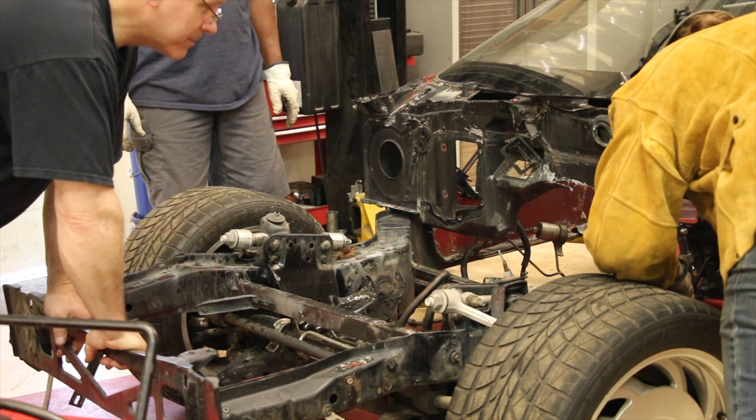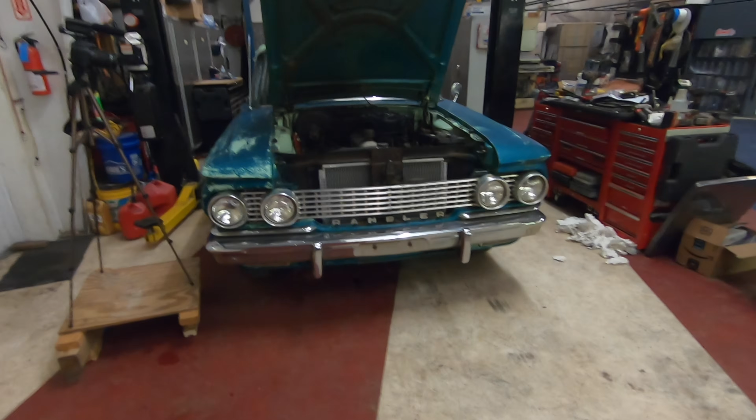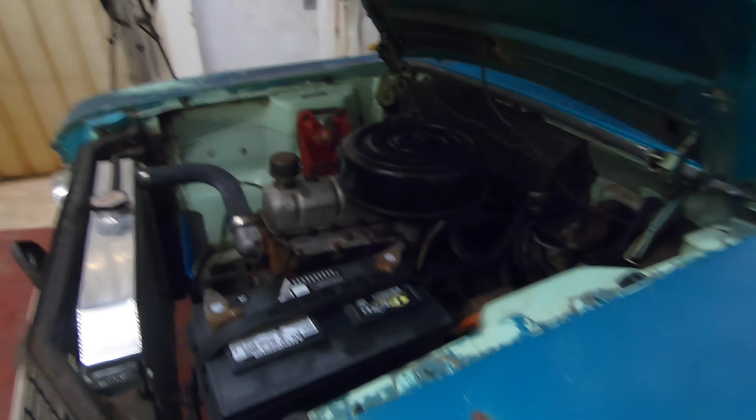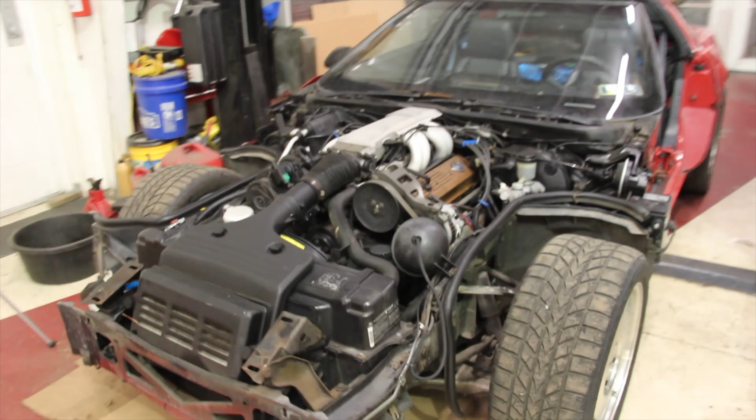Alright guys, so we're back on the Rambler station wagon build. If you haven't been following along, we are taking a 1961 AMC Rambler Classic station wagon and essentially putting it on top of a Corvette frame. But that isn't as easy as it sounds, so we are ripping the entire Rambler apart, ripping the entire Corvette apart, and designing the entire frame in CAD from scratch. We had to measure the entire Rambler, measure the entire Corvette, and then design how they're going to fit together.

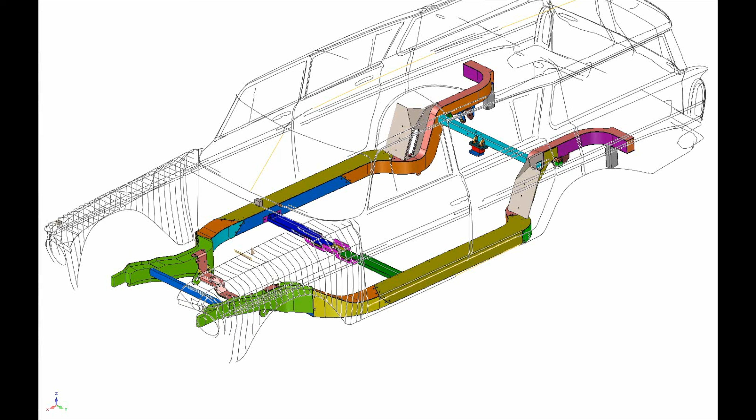So at the end of the last video, this is kind of where we left off. We are using the green section of the frame, which is the front of the Corvette frame, and the rest of the frame we are making ourselves. So in this video, we have to figure out what power plant we're going to use and how we're going to fabricate the rest of this frame.

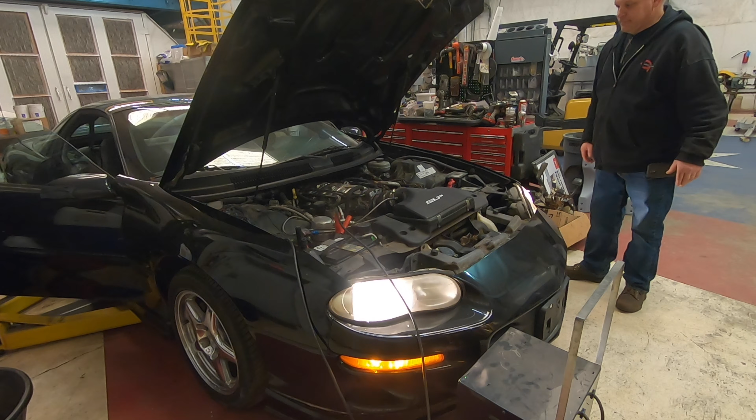So I know you're thinking, another LS swap. Yep, that's what we're doing. It is the easiest and the most affordable way that we can make really good power in the Rambler but keep it reliable at the same time.

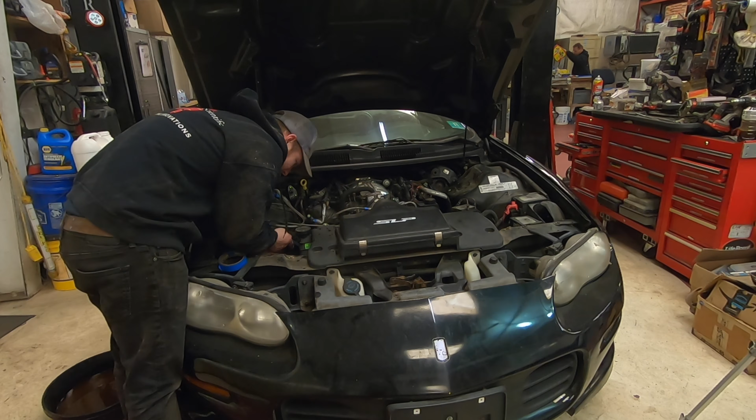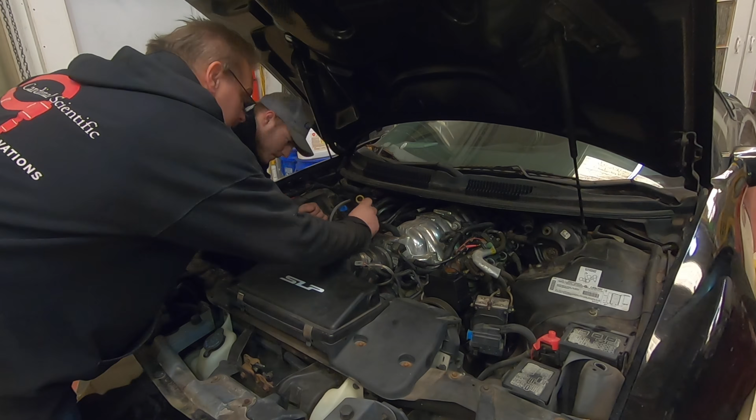So we ended up picking up a 1999 Camaro that was already built with heads, cam, an aftermarket clutch, a T56. It was tuned, it had injectors. It was a really nice car, but ended up having a salvage title, so we got the entire car pretty cheap, running and driving. That way we could test it out, see if it was good. And it was a really good platform to start with because we had the whole harness and everything that we could use. So as you can see here, we gotta rip the whole motor apart so we can try to fit the motor into our chassis we're building.

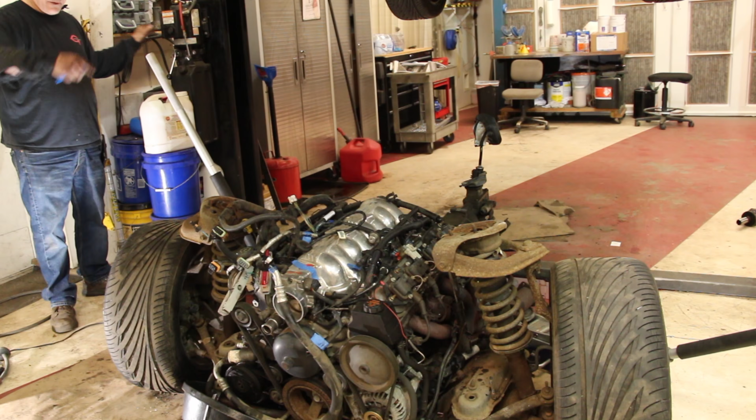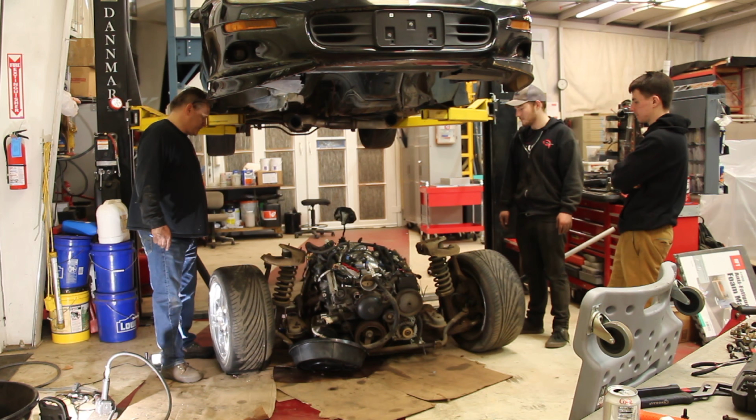So we got the motor out. We were kind of baffled about how tight it was, and it was kind of nerve-wracking to see how tight it was in that Camaro. If you're not familiar, F-body Camaros are super tight engine bays. The motor's really shoved super far back under the cowl, so you can't even get the intake manifold off easily. It's just really difficult to work on inside the car.

But we ended up dropping it out from the bottom and getting it planned out into our chassis. Alright, so this is what it looks like with the motor in the frame.

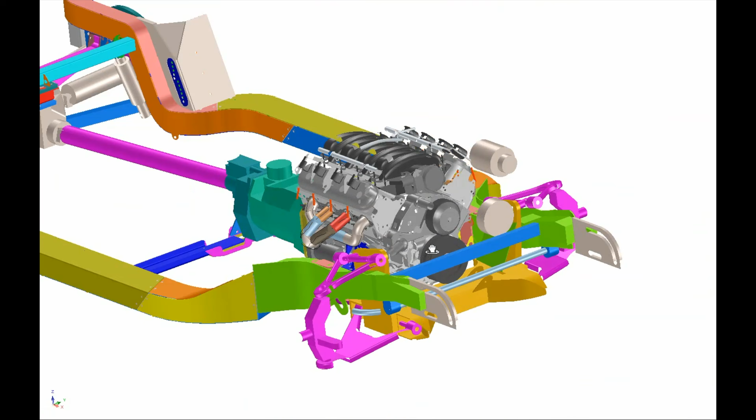As you can see, we wanted the Corvette to handle just as well as it did like it was designed from the factory. So we wanted the motor to be pretty far back, kind of like it was originally in the C4, but obviously with an LS. And if you don't know, a C4 is a cast iron block and an LS1 is an aluminum block, so we're saving a little bit of weight off the nose.

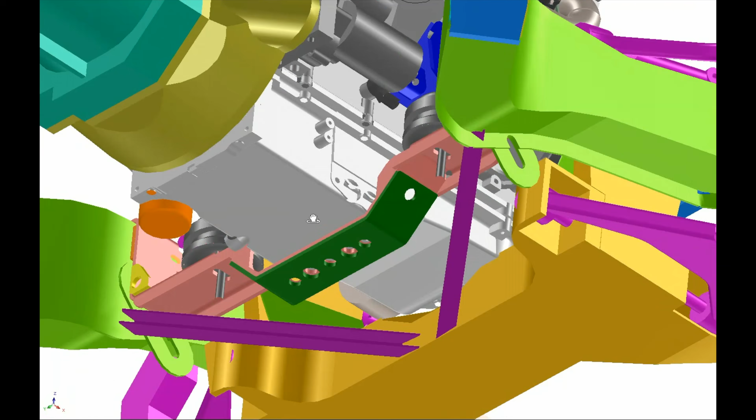We also have to design a cross member for our T56 transmission and engine mounts for our LS. So we decided to go with a C5, C6 style motor mount. They're a lot easier to get in and out, it's just 2 bolts from the bottom. I recommend if you guys are doing LS swaps to try to incorporate those motor mounts. They're super awesome, and it made the frame go together pretty easy.

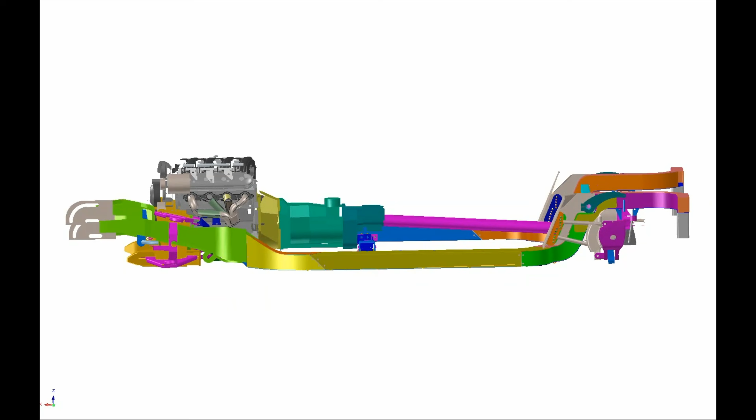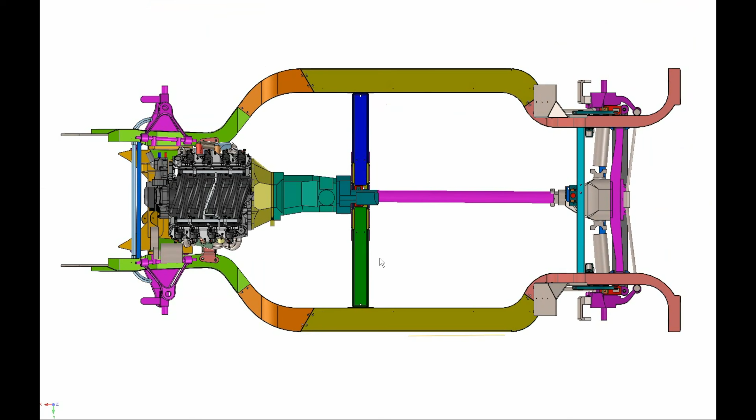So as you can see, kind of a side shot of the frame. Look how tall the transmission tunnel is and the drive shaft tunnel has to be if the frame is the bottom of the floor. So we're going to have a pretty big invasive transmission tunnel and a pretty big invasive drive shaft tunnel that we're going to have to accommodate for in the frame design. But you know, that's part of it. Because it's independent rear, the drive shaft doesn't move, so it's going to have to be tucked up pretty high.

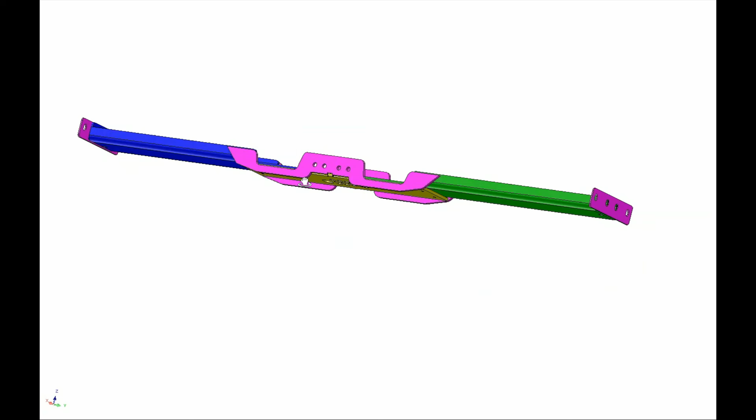So now with our cross member for our T56 transmission, the frame's super wide, so we need a strong cross member that is also low profile because the floor is so flat. So we have some bracing in it and also some cutouts so we can fit our exhaust underneath.

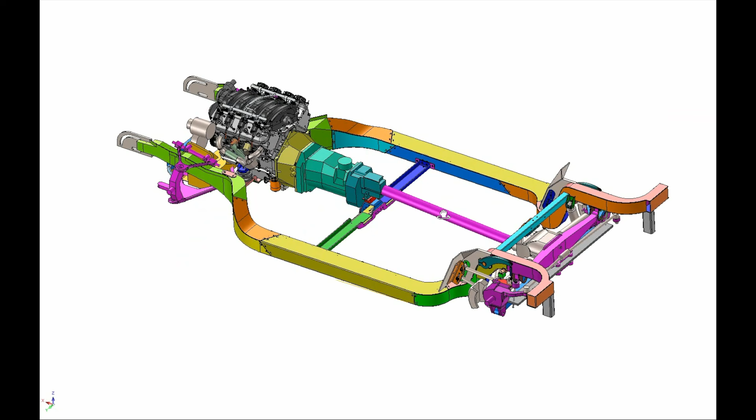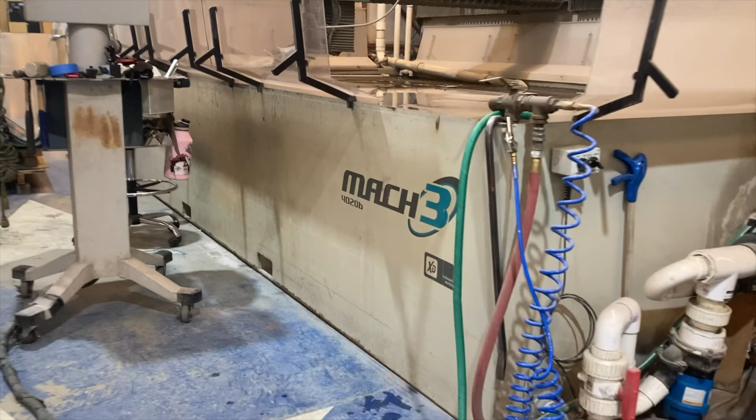So now it's time we gotta start making this stuff. The way we're gonna start manufacturing this is we have a water jet, which if you're not familiar with what a water jet is, it's a machine that can cut a variety of materials with just water and a little bit of sand. This is able to cut out all the pieces that we're going to need for the Rambler frame and be able to cut them precisely enough so we can bend them up and weld them together. So let's start making this frame.

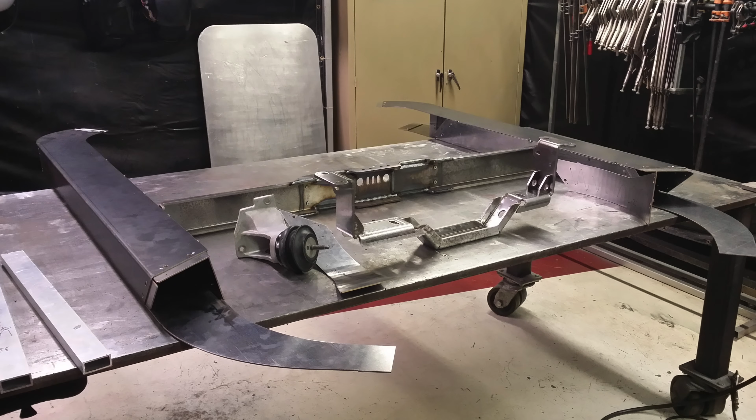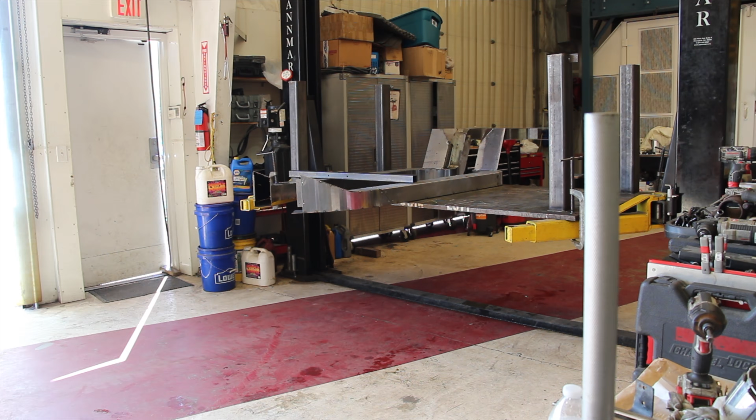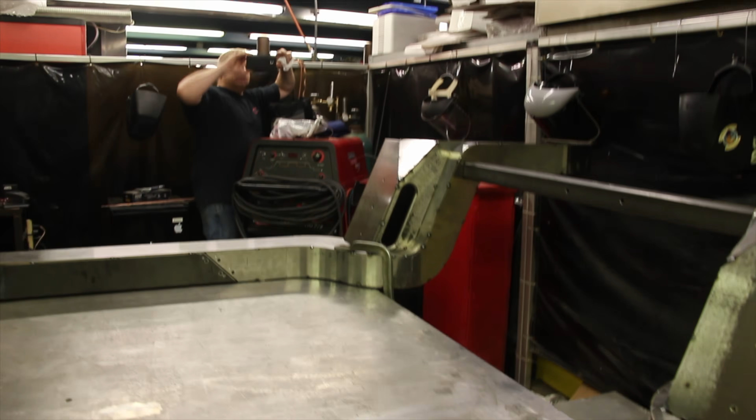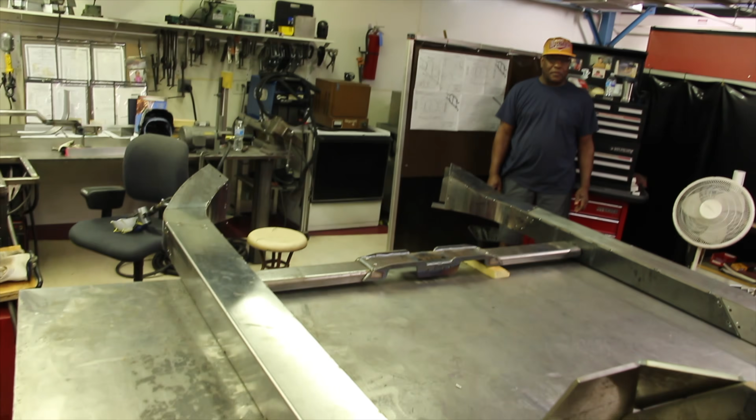I don't have a ton of footage of us bending up the frame and welding it together, but you get the idea. We water jet the parts out, go to the press brake, bend them, and have our welder Don weld them all together to mock up what it's going to look like. The way it goes together is kind of like a box, and he just has to spot weld them together. They're reinforced on the inside, and then he can go through and seam weld all of them together at the end.

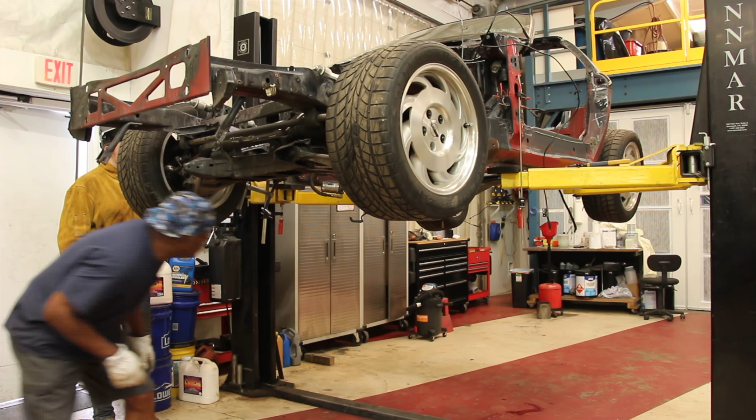Now we're going to start cutting up the C4 Corvette. On the front of the frame, it looked like it got hit or bent a little bit in its previous life. It wasn't severe enough to really concern us, but we noticed it so we could account for it when we weld the front clip to the frame we're making.

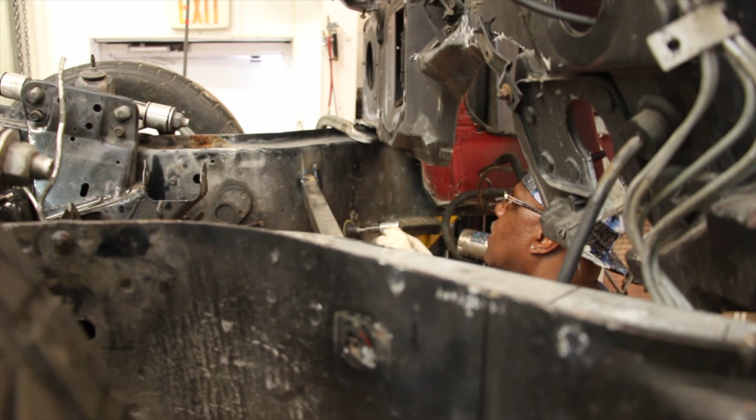When they cut the front of the frame off, it has to be really perfect because it has to line up with the frame perfectly so we can weld that piece together.

There we go, pretty non-eventful. Grab that cable off of that.

Christian, what did you do, man? You're supposed to be welding the car together, not cutting it in half. Broke my Corvette. Broken, not. Good job, look at that. They're perfectly balanced too. Good job. Sweet.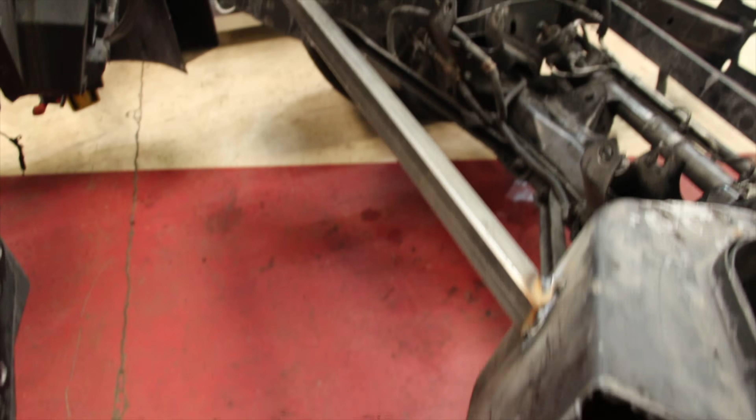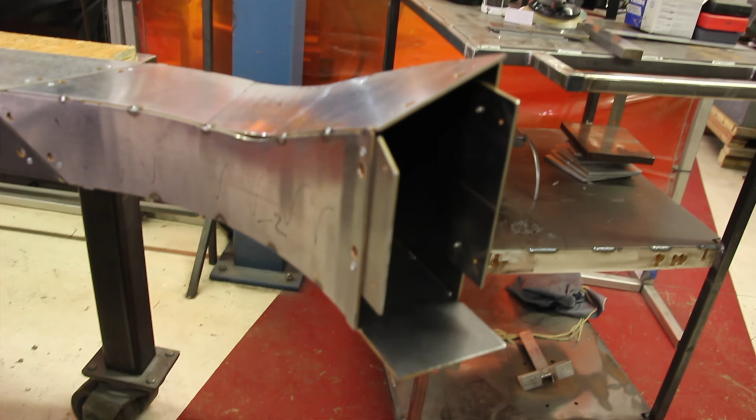When they cut the frame off, it looked pretty good. The edges were nice and straight, so we could clean them up with the Sawzall, and then start figuring out how to mock up attaching it to the rest of the frame we actually made. Here's a better shot of the end of the frame where you can see how we have the tabs laid out. A lot of it's riveted together so we could mock it up, and then he can go along the edges and seam weld the rest of it together.

This lets us slide the end of the frame into the Corvette part of the frame, and it should line up pretty straight. That way everything is nice and square whenever we go to weld it.

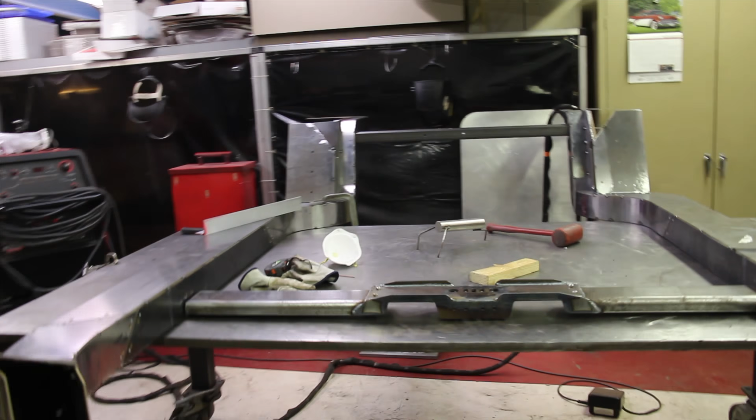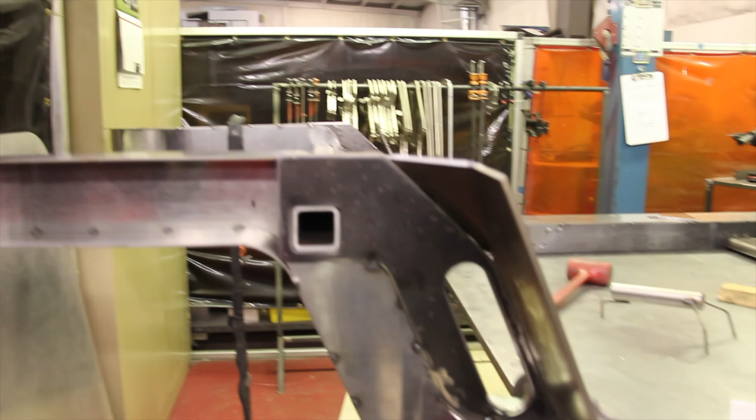You can also see our cross member and our back suspension where we're going to mount our independent rear. The big slot is where we'll mount our control arms for the rear suspension. They're actually hollow and don't have just tapped holes in there because we want to make a different style of mounts, so we can go through and adjust different suspension parameters depending on what type of racing we'll be doing with the Rambler.

This will let us dial in the suspension and make it adaptable to a lot of different scenarios. The rectangular crossbar in the back is where the rear differential is going to mount, and that actually ends up being where we put our rear sway bar through as well. That also acts as a brace for the frame, because you can see how wide it is.

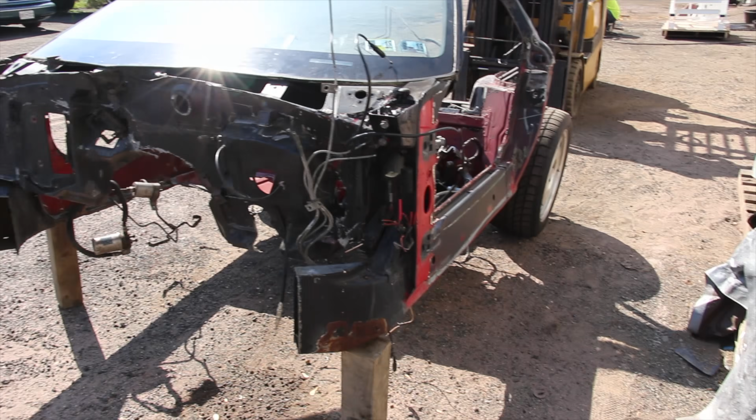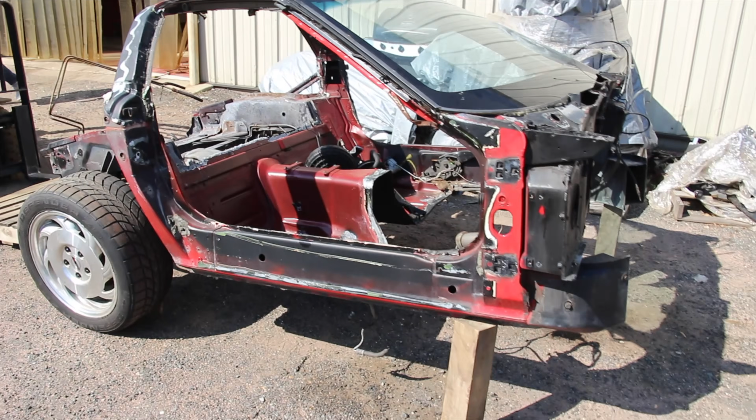It's going to need a lot of structural bracing in the floor that we'll have to come up with to brace the frame together so it's not flimsy. This is what's left of our Corvette. We probably didn't need the entire car, but we ended up buying the whole thing anyway. We probably only needed the front clip, but that's all we used on this build. We also have the rear suspension that we haven't pulled out yet.

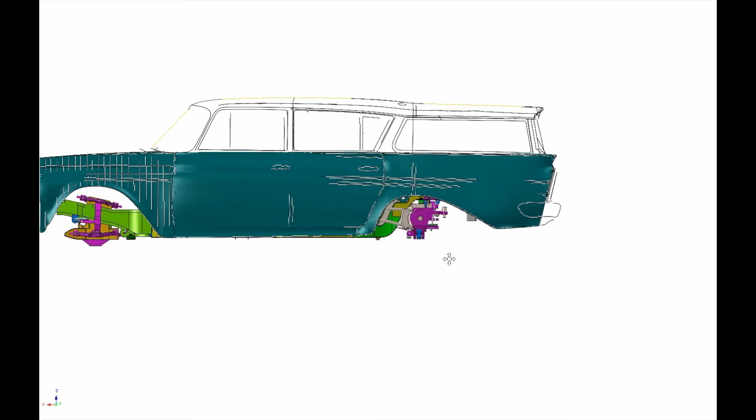Now with our Rambler build, we kind of have what's pictured in our CAD file in real life. We have our frame made up, and we're fitting it to the front clip, and then we're going to install our rear suspension and see how this body fits on top of our frame.

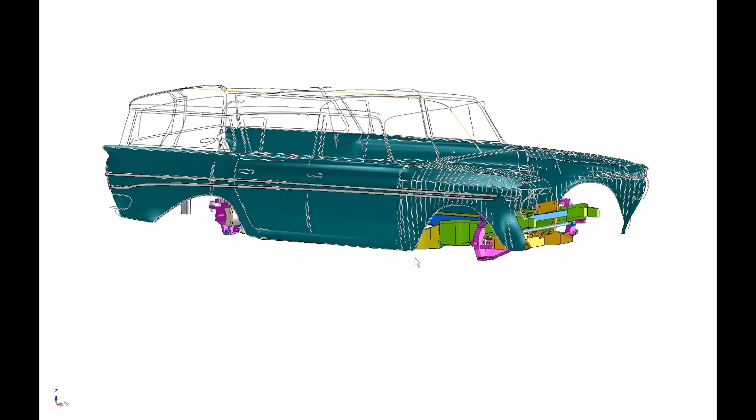As you can see in our CAD file, we've put all of our points together from the FARO arm and made a body-like structure so we can see where everything's going to fit and how it's going to look, so we can get the stance and everything set before cutting up a bunch of cars and wasting time and material trying to figure out how it's going to be. Doing it this way will save us a bunch of fabrication time in the future.